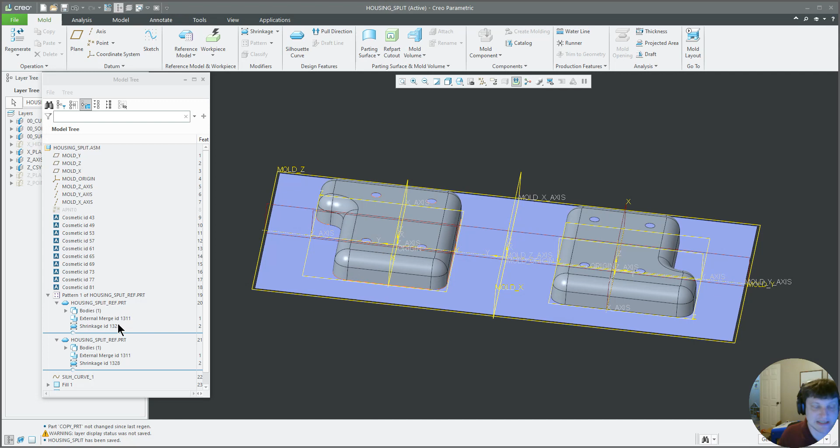So I have like 4 or 5 checks of shrinkage just to make sure, because if you mess up shrinkage, you can mess up an entire tool. You can make lots of little mistakes, and missing shrinkage is a little mistake in terms of how easy it is to forget. But you can do a lot of little mistakes that don't cost nearly as much money as missing shrinkage. So you always want to make sure you check shrinkage. Shrinkage, shrinkage, shrinkage, make sure it's right.

Make sure that when you put that value on your drawing, you get it from your model so you know it's correct. Okay.

So now we have our parting surfaces and everything like that, so now we need to create a workpiece. Create workpiece, WP for workpiece, start part, default, so it's just back down to the center of the block.

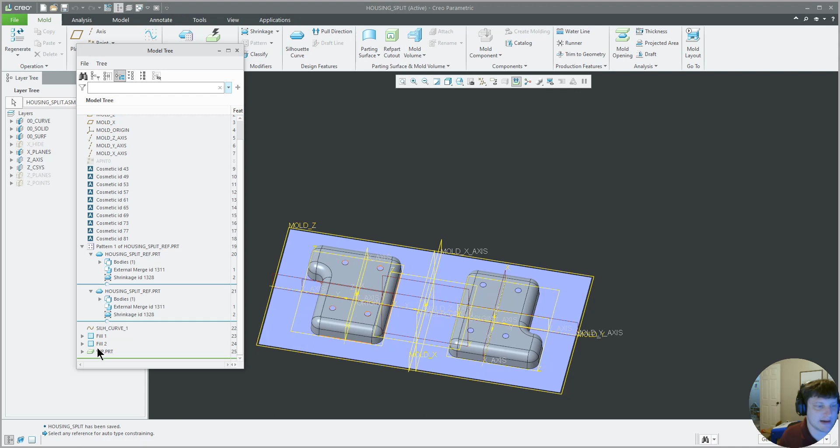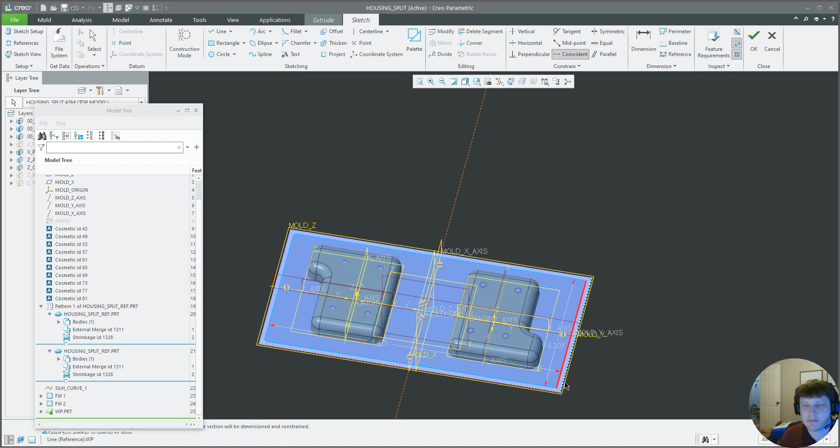Now we're going to right click, activate our workpiece, go to extrude, define, and then we're just going to draw a rectangle, center rectangle. We're actually going to use that fill as our constraint system, so that fill is determining how large this is. Now we are to where we size it.

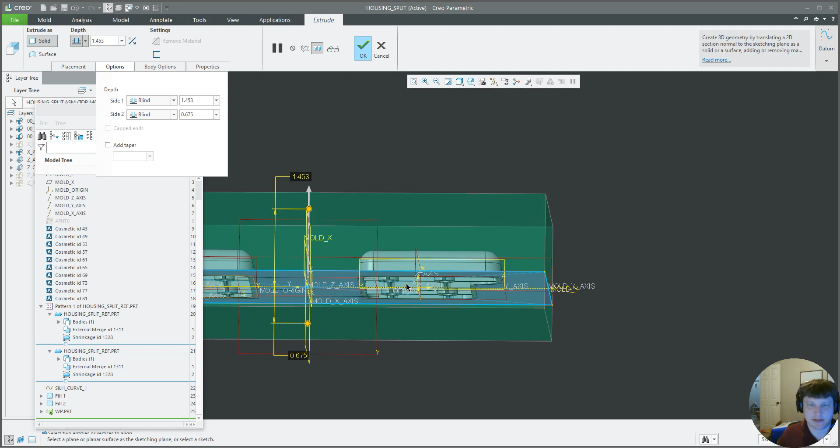So we want to do both sides. Now this is going to go into a mold base, so I'm not really too concerned with how much the resulting part sticks above this plane. I'm concerned with how far this plane sticks into the next block. So let's say we could use an 875 plate because they come in increments of 7/8, and we could use...

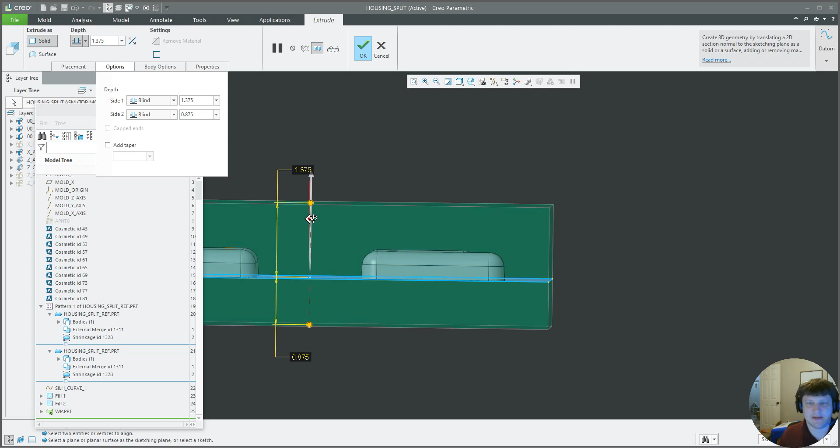That would be a little tight. Yes, we'll use that. So there we go, and now we have our block sit there. Now all we do from then on out is go to... what the heck?

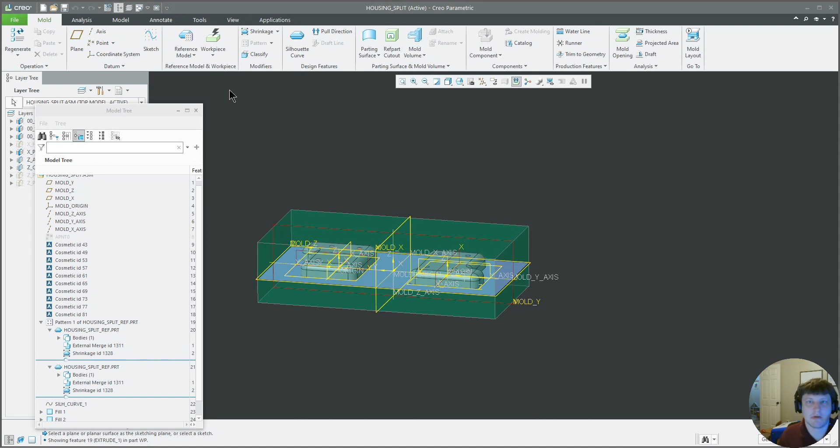Oh, there we go. So we go to volume split, go to 2 volumes. We have to hit this button up here, reference part cutout, and we have to select our parts. And that basically just removes the parts from the workpiece. This is the workpiece, it's selected. These are the parts, so then you just have the cavities of the block.

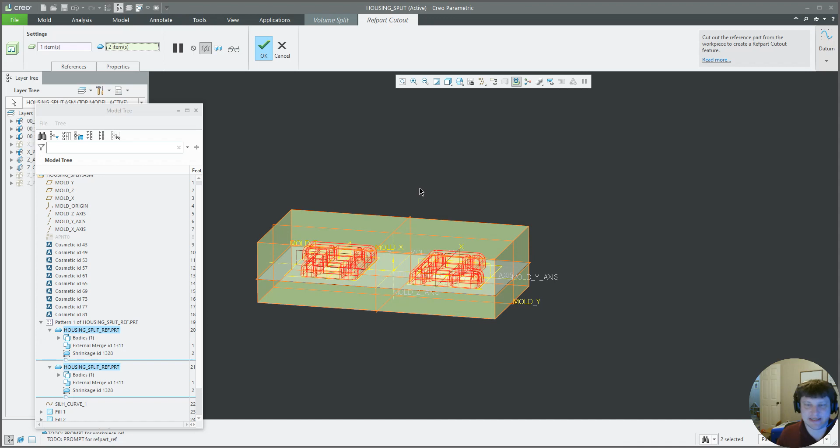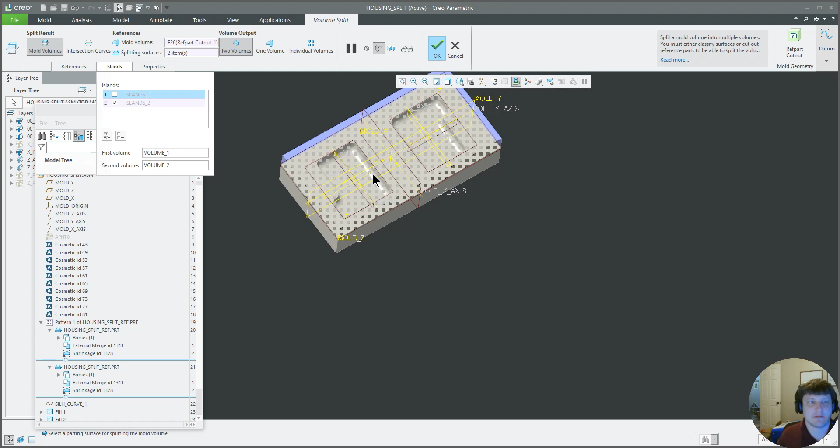You confirm that. Now we're going to select our parting surface and the surface that closes those off, this is where wireframe comes in handy, and now we can go in here and click, and we can see that that is the cavity. So island 1 will be housing cavity, housing 2, island 2 is housing core.

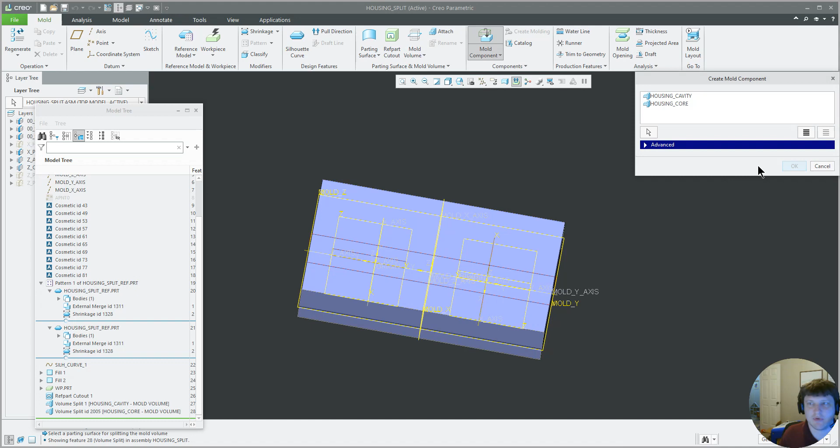And we confirm that. Now we have, and if we went to extract mold components, select our start part again, now we have 2 blocks that have our mold surfaces in them.

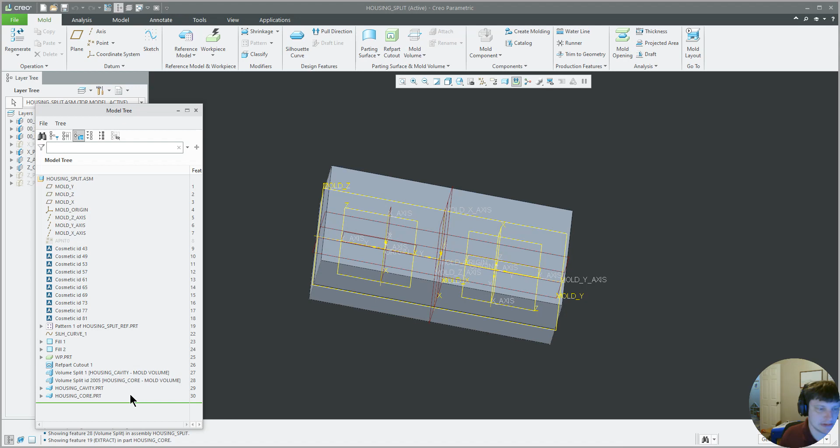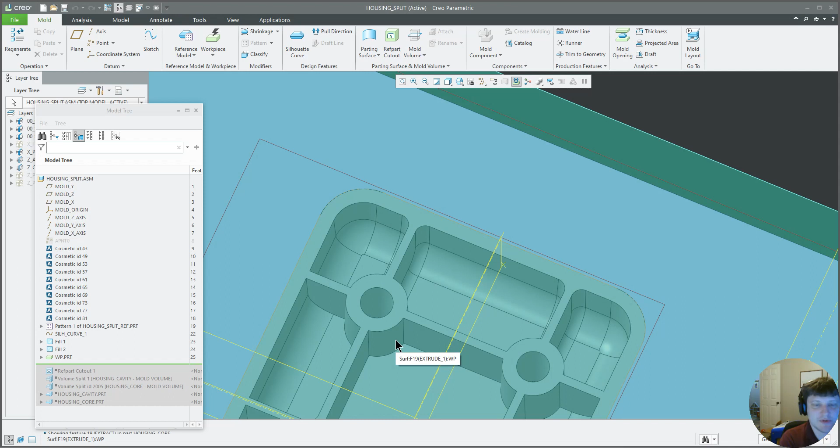But there's something I don't like. You see, these would be done with core pins and ejector sleeves. Ejector sleeves are a type of ejector pin that pushes the part from the mold that goes around a pin. So the pin is stationary, the pin stays in place, forming this boss, and then it goes all the way back through the entire mold.

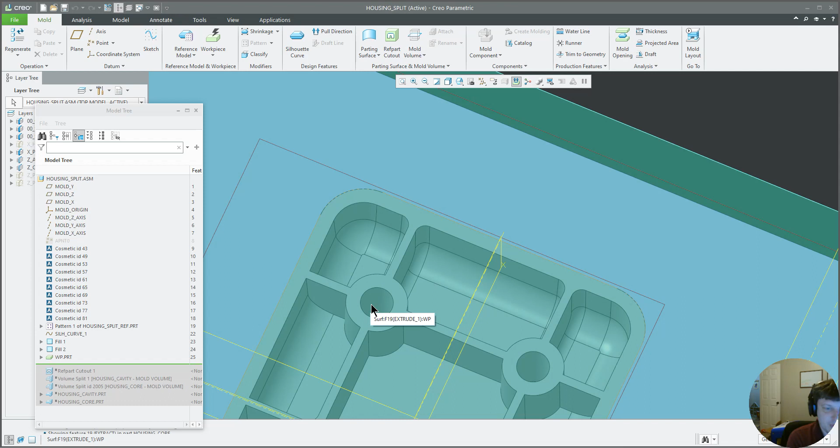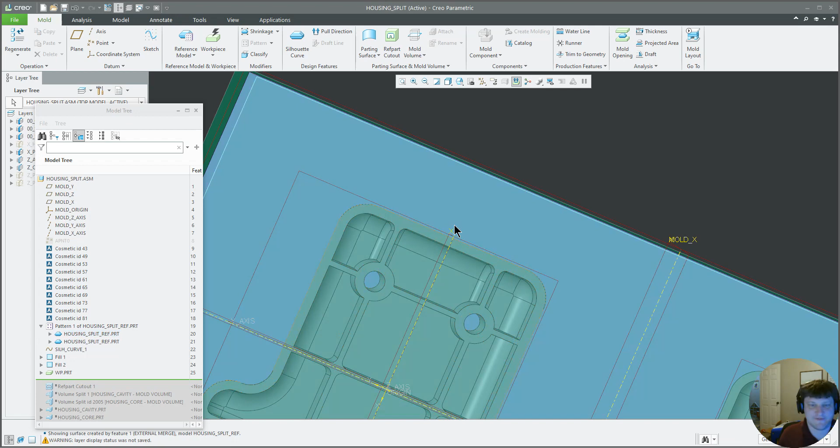And then in the ejector plates, there lies an ejector sleeve, which has a hole through it that the pin passes through. And that ejector sleeve can push up with the ejector plates, push against this surface right here, and eject the part from the mold. And that's a preferred way of doing it with pins like this, because the pins are difficult to eject from since they tend to stick.

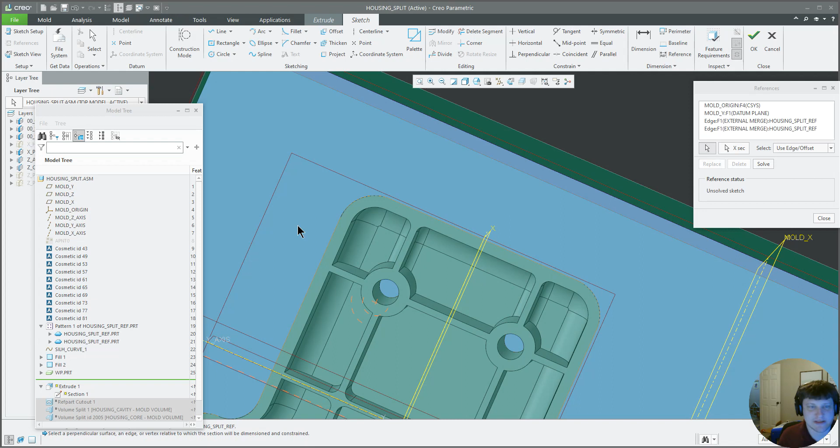So what we'll do is model, extrude, surface, define, pick the surface, and we're going to do references there and references there. And we're going to draw a circle bigger than that. Oh, we don't want that to be construction mode.

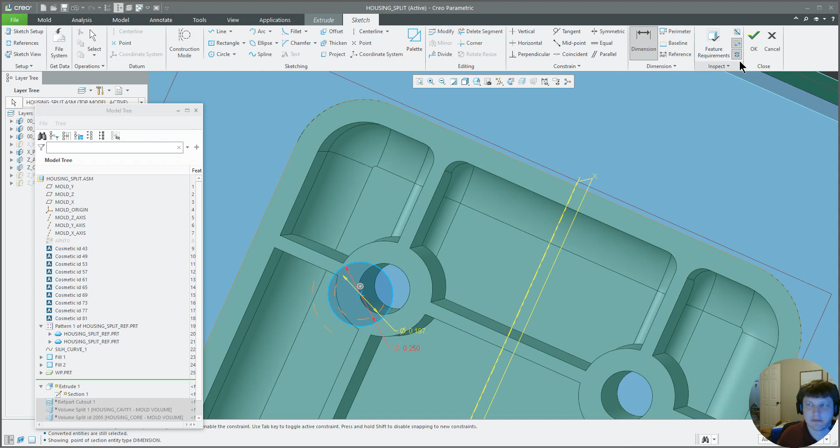Now this circle is 0.197, so probably a 1/4 inch pin. Actually, yeah, that'd be a standard size. Let's flip this around through all. Oh, not that, we'll just make it to next. There we go, we confirm it.

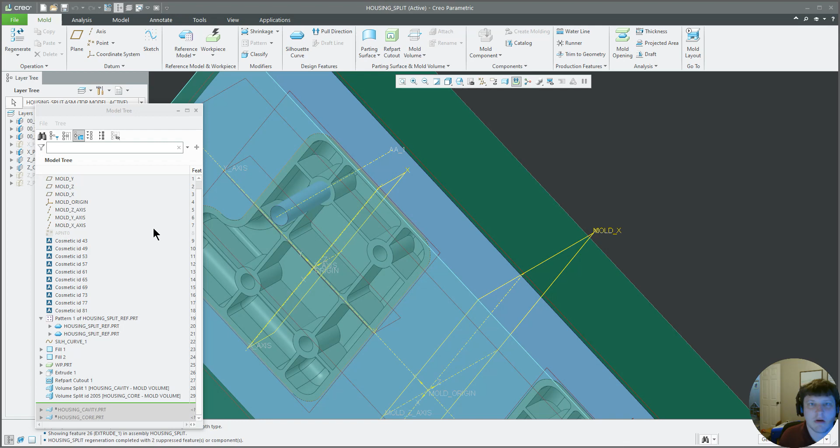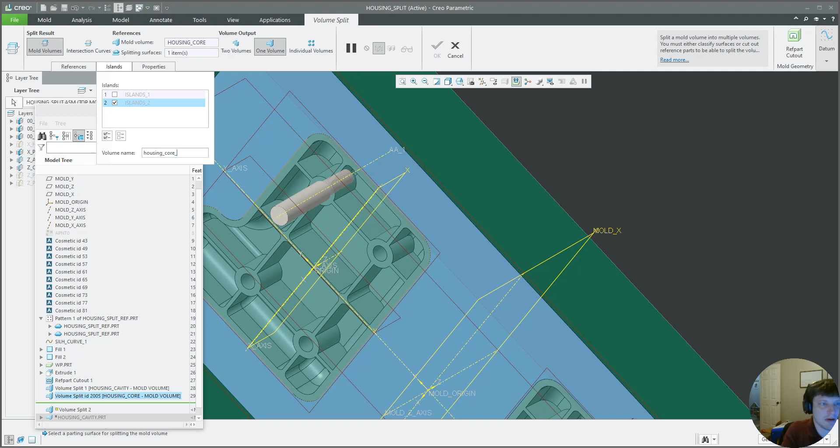Now what we can do is resume this, go to mold volume, volume split. We're going to select our core housing and this surface. We're going to do one volume. Select, we don't want that island, so it's this island, so it's housing, core, pin. And since they're all identical, we only need to do it once, so we just extract the one pin. And that's it.

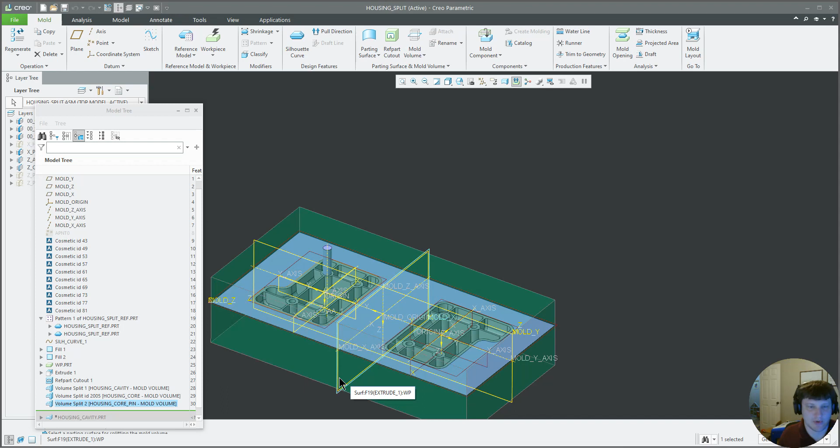So that is the gist of our split. Now we'll need to create the other features in the mold and flesh this out into a complete mold.